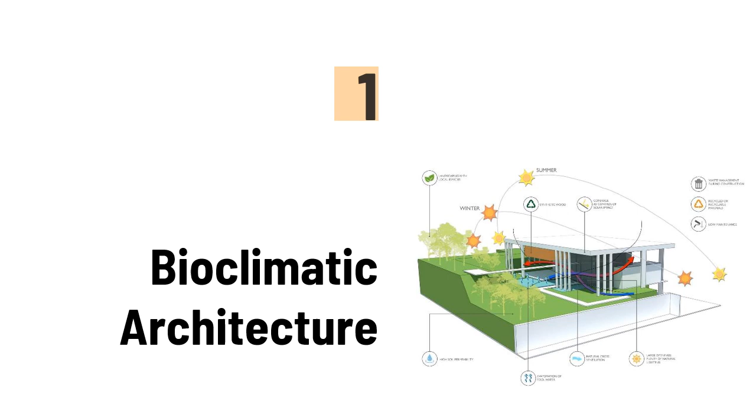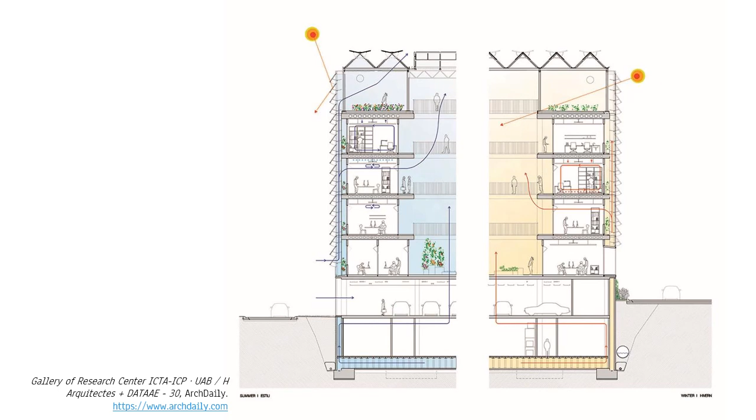With its roots in vernacular construction, bioclimatic architecture finds its ground on the formal, conceptual, and material suitability of a building to the environment and climate of its location, to ensure thermal comfort and high energy performance. Through the optimized use of available natural resources, each region developed its own architecture, and with time and continuous improvement became part of people's memories and identities.

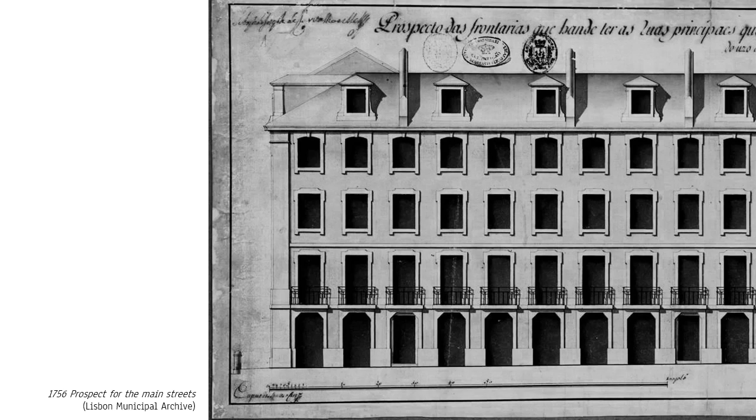All over the world, we observe that the constructions and shelters of countless civilizations have indelibly marked the landscape, showing a correlation between the built form, matter, and climatic conditions of each region. Despite the novelty of the term bioclimatic architecture, its core principles are supported by hundreds of years of empirical experience. Ancient or historical buildings have in their conception a range of bioclimatic principles that is worthwhile analyzing and understanding before any kind of invasive intervention. The 18th century Pombaline architecture in Lisbon is no exception to this.

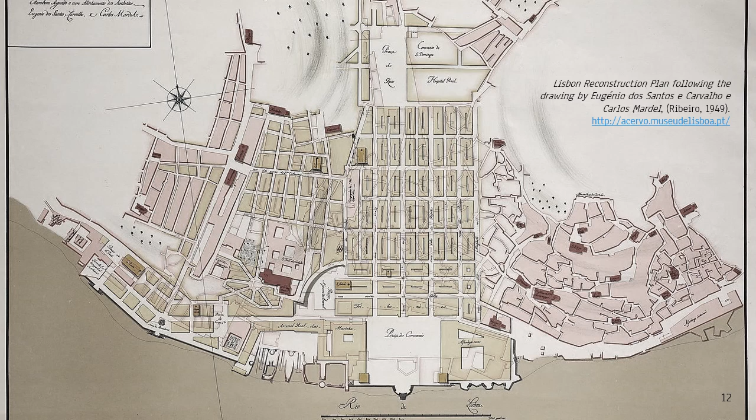The Pombaline architecture appears by the hand of Sebastião José de Carvalho e Melo, also known as Marquês de Pombal. It was the political elite's response to the earthquake that devastated Lisbon downtown in 1755. The reply to this was the Plan of 1758, whose structure is based on the orthogonal layout of a set of rectangular blocks. This plan is considered a forerunner of modern urban planning that breaks with the pre-existing vernacular morphology and paves the way to the 19th century city at a social, formal, and functional level.

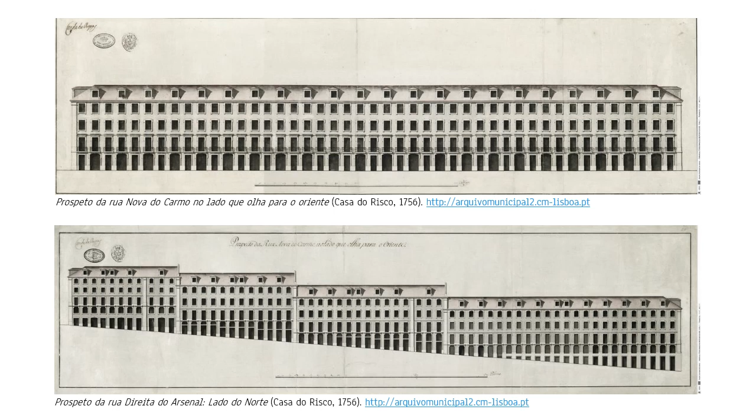One of the plan goals was to increase Baixa salubrity levels. The air and light were among the guiding principles of the new Lisbon. The Baixa new design with wide and straight streets facing the river and the sun was the recipe found to carry out this purpose. It is likely that the bioclimatic principles observed in vernacular constructions and consolidated with time and countless experiences, as well as the vivid memory concerning the old city condition of decay, provided an empirical knowledge base to support the new design.

This idea is highlighted by Mascarenhas when he says that ancient buildings were empirical constructions based and improved with experience, and reinforced by França by referring that the word empiricism always returns when you try to unveil closely the Pombaline reality, in any plan at any level that it is. Over time, with the argument of adaptation to the contemporary society, most of the Pombaline buildings in Lisbon downtown have been continuously intervened upon through ill-founded operations with harmful consequences not only for their heritage value, but also their environmental balance.

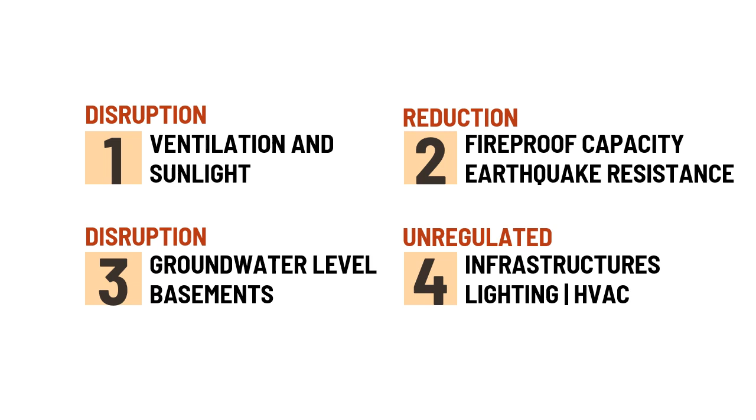Some of these led to disruptions in indoor ventilation patterns and sunlight due to the growth in height, terraces, chaotic occupation, and unregulated changes and adaptations in indoor layouts, reduction in the fireproof capacity and earthquake resistance capacity, disruption in the groundwater level of the area with the construction of basements, deterioration of existing rendering mortars due to introduction of new modern infrastructures such as lighting, telecommunications, and HVAC devices, just to name a few. What this intervention shows us is the lack of knowledge regarding bioclimatic behavior in the training of architects and engineers concerning historical buildings. They are unaware of the bioclimatic and environmental consequences of their actions.

Using the Pombaline as an example, our study aims to lay the theoretical foundations for a bioclimatic ethic approach when intervening in historical buildings by identifying references in historical documentation of this period that are evidence worth respecting and keeping. One of these documents is the 1756 dissertation by Manuel da Maia, which contains some passages concerning this subject. In the first part, Maia mentions the relation between the building's height versus street width, where security-related issues assume the primary concern, but whose outcomes influence the amount of sunlight and radiation received and the local wind patterns. Also, the constant floods that occurred at high tide were solved by landfilling using the debris of the collapsed buildings during the earthquake.

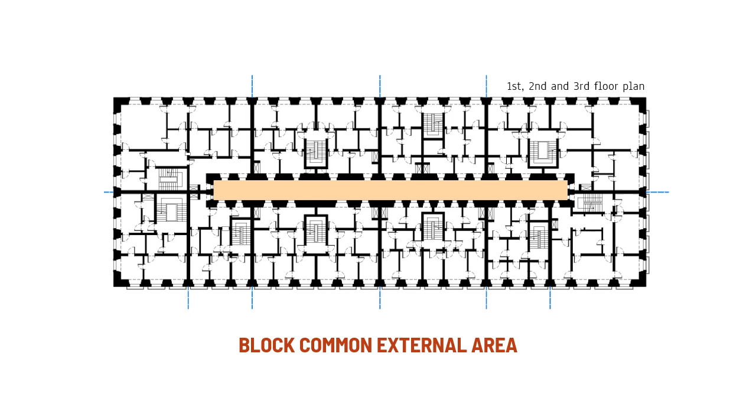In the second part, Maia expresses distress about the conditions of Rua Nova dos Ferros and Rocio due to a problem of stagnant waters, harmful to the air quality and the inhabitants' overall health. In the third part, Maia discusses the salubrity topic in depth, mainly regarding solving the problem of bad smells and the poor air quality of the entire area. To this end, he points out three possible solutions. The third denotes the idea of a common external area in each block, where garbage is thrown from the dwellings and collected once a year in autumn. In fact, the implementation of this third measure has also proved to be decisive for cross-ventilation purposes inside the dwellings.

Also in the third part, points 18 and 19, Maia refers to the third prospectus, drawing of the building facades in Baixa and Terreiro do Paço, foreseeing the existence of porticos or arched galleries against the inclemencies of weather. Despite being focused on security features, Maia does not disregard the climatic issues. On the contrary, they influence and shape the architectural image of this area. It is certain that from a bioclimatic perspective, the gesture of designing arched galleries would provide shelter from the rain and shade from the sun, influencing the wind pattern and temperature recorded at street level.

Another document worth referring is the 1758 King's Charter of May the 12th, mainly the sixth point, where concerns of this nature are expressed. It refers to a compensation to be paid to owners of buildings located in less salubrious areas by those who own buildings in locations that receive the benefits of less danger in earthquakes and fire, of greater clarity of light, of greater freedom of air, of greater ease in driving, of greater frequency in passing, and of greater value.

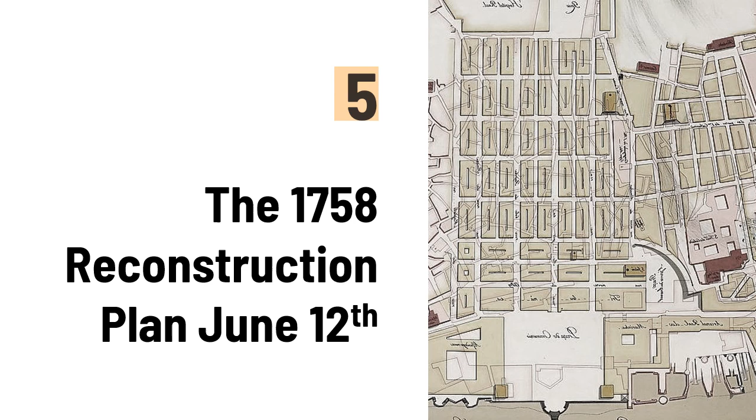In another document, the 1758 Reconstruction Plan, we can find on the 14th point the description of the building heights, floors, proportions, and fenestrations in detail, which are decisive to achieve the desired quality standards. On the 18th point, the plan explained the utter importance and need for cross streets, streets that are perpendicular to the main streets, concerning the city service and for the freedom of air and light, even for the inhabitants of the main street.

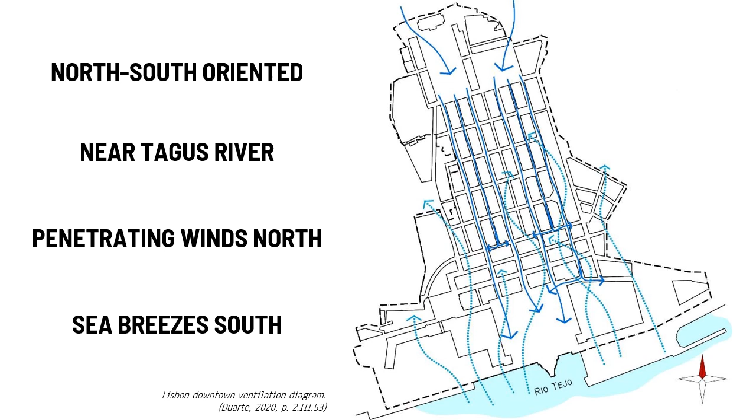In accordance with this, there are urban design concerns that favor the ventilation and luminosity of Baixa public space, such as the main street north-south orientation and proximity to the Tagus River that favor both the penetration of wind from the north and the sea breezes from the south, improving outdoor thermal comfort during the hot season.

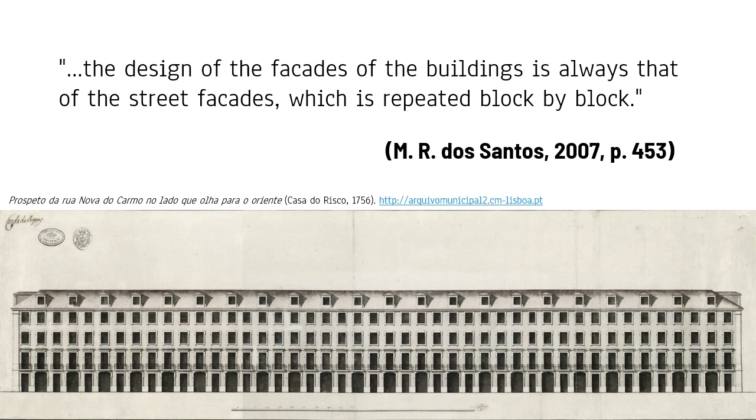The Pombaline architecture embodies the military spirit of its authors, expressed in the rigor, austerity, repetition, and mass production of constructive elements. This trait crosses all scales of Pombaline composition, where the design of the facades of the buildings is always that of the street facades, which is repeated block by block. Additionally, it incorporates features from the traditional Portuguese architecture since the Romanesque period, an unornamented, heavy, and marked horizontal proportion.

This results from the consolidation of a way of building, considering the Portuguese climate specificities, ending in a constructed system of serene and pragmatic classic design, technically prefabricated, anti-seismic and anti-fire, heralding a pre-industrial modernity.

Finally, regarding composition and style, we must highlight the influences of the architectural treatises of that period, with a special mention for the Serlian style by the Italian Sebastiano Serlio and the French architectural treatise of the late 17th and 18th centuries of Augustin Charles d'Aviler, among others. Aviler's treatise poses the major influence, mainly in fenestrations and their compositional criteria.

According to Eduardo Duarte, windows on the bel étage, the first floor, should be taller than the ones on the upper floors, and these should decrease in size due to certain mathematical propositions. In this context, Aviler makes considerations that fall under the bioclimatic domain, addressing that window size and proportions should be carefully considered. Otherwise, it can lead to overheating or overcooling of indoor spaces and excess or deficit of natural light. The tuning of this proportion is key, as large or too wide fenestrations can structurally compromise the external wall.

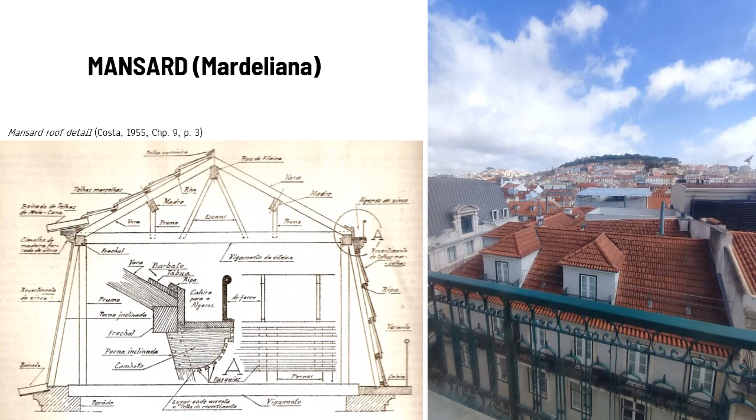Also, Aviler's influence is noted in the roof component, mainly in the Mardeliana mansard type, named after the architect Carlos Mardel, and in the facade's aesthetics, clean, simple, and restrained in decoration without protruding elements. These features impact indoor and outdoor comfort as they affect ventilation rates, wind patterns, and the amount of sunlight and radiation.

Understanding and preserving bioclimatic principles in a contemporary intervention is the first step to reach comfortable and high-quality energy retrofits, paving the way towards near zero or even zero energy building standards. We advocate that uninformed interventions have the power to disrupt the bioclimatic balance of an historical building, interfering with the primordial idea that relates the built form with its surroundings, ending in harmful consequences at a hygrothermal and energy performance level.

Therefore, the architect and the engineer must sustain their practice with a bioclimatic ethical approach when retrofitting sensitive built fabric. They must be aware and able to interpret past bioclimatic references and gestures as a path to guide an intervention toward the constructive and architectural truth.

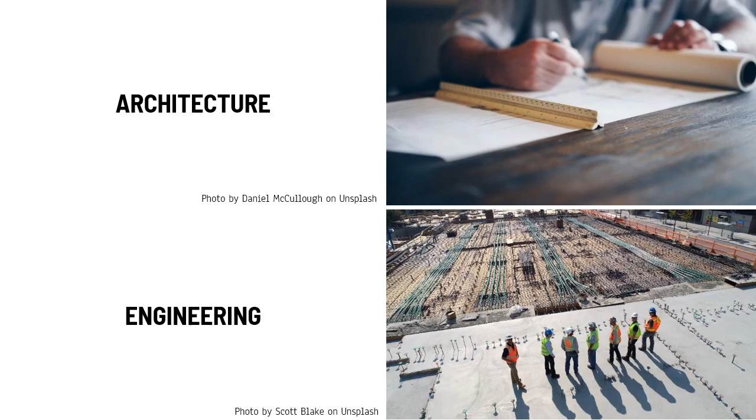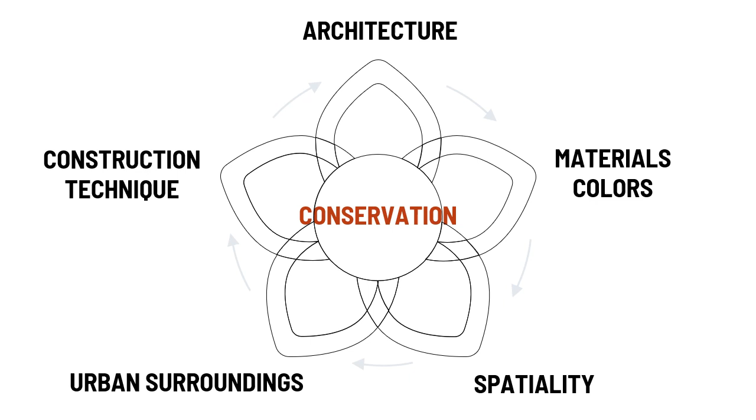If the preservation of architectural features, construction techniques, materials and colors, spatiality, and urban surroundings are consolidated practices and part of conservation principles stated in the charters of ICOMOS and UNESCO, then why is the quest for its bioclimatic core ideas often forgotten and disregarded? Is this dimension even considered when discussing authenticity in buildings? Do we need to foster a culture that relies on bioclimatic ethic when doing an energy retrofit? These are some of the questions we'd like to open for discussion.

With greater or lesser subtlety, it is evident that the main actors involved in Lisbon reconstruction considered bioclimatic principles displayed at an urban and architectural level. Such evidence is noticeable in passages from Maia, namely in the first, second, and especially third part of his dissertation, and in the key documents of 1758 King's Charter and Plan Documentation, in short but revealing passages concerning the level of salubrity intended for the outdoor and indoor space. Additionally, the Serlian style and the late 17th and 18th century Aviler architectural treatise, both sources of inspiration for the plan authors, also exhibit evidence to support this claim.

Our study intends to raise the awareness of existing bioclimatic core principles among architects and engineers involved in historical building retrofits, particularly in Pombaline buildings. We stand that deepening the knowledge of past bioclimatic references enables the emergence of a culture based on bioclimatic ethic, where its understanding is critical to ensure today's thermal and energy quality standards, restore or maintain the building environmental balance with its surroundings, and, what is more important, preserve its authenticity and heritage value for future generations.